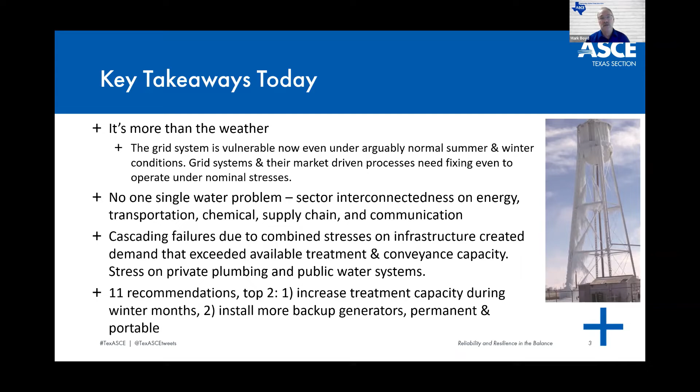As you'll see on the upcoming slide, it's not just about the weather. The grid and its associated system processes are vulnerable even under nominally serious weather conditions. The weather is only part of the story. Cascading failures were experienced in 2021, which necessitates a hard look at private and public plumbing water conveyance systems and processes. Increasing available treatment capacity all year round and hardening key infrastructure against power loss are two of the committee's key recommendations. Julie will go over the 11 recommendations set forth by the committee toward the end of today's presentation.

The committee's position is that weather is part of the story, as I said, but not at all the most important part. The grid is vulnerable to stresses from weather and climate conditions well within the extremes experienced in February 2021, such as the infamous event of February 2011, which is not nearly as severe. I'll speak more about that shortly, but first let's talk about what happened that week. Next slide.

So Texas became a purple state that week, apparently. It's not political, it just did. We chose this color. Extreme conditions, absolutely yes. These two graphics tell the story by the numbers in a sense. By and large, the entire state was blanketed in a minimum and maximum daily temperature 20 to 25 degrees below normal mean temperatures. The comparative normal temps we used were based on recent averages, 1991 to 2020.

But what really happened? The weather system event of February 2021 was severe. It was the first time in history that all 254 counties were placed on winter storm warning. Fortunately, the physically damaging ice storms during winter storms Uri and Viola were localized in impact and wind was relatively moderate. Temperatures were not. Some NOAA experts have indicated that the storms were a 1 in 100 year or 130 year system event. The severity of winter storms' impact on infrastructure has four primary dimensions.

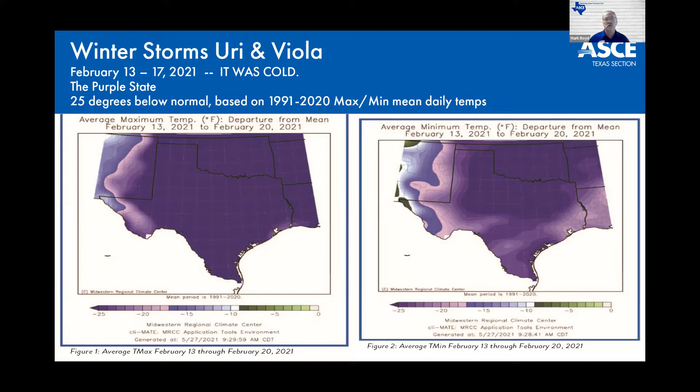So here's kind of a historical perspective on this. With Dennis Qualls doing much of the heavy lifting on the concept, this graphic was put together to display the 2021 winter storm in historical perspective. So I myself looked at hundreds of weather station data spreadsheets, and I was looking for stations exemplary of major population centers throughout the state. So no doubt a researcher could do a deep dive and find some regional data that does not reflect these exact characteristics. The color code scheme is explained on the graph, but basically we were trying to depict which historic storms might compare to the severity and danger to the public of the 2021 storms.

We identified 6 storms which had statewide impact similar to the 2021 storms. The most dangerous event in the 80-plus year record happened in 1940, when the population was substantially less, at 6.4 million in Texas compared to today's 30 million. Per capita demands on the grid were much lower back then. Home heating was not as much of an issue with wood burning stoves, and there was a much higher percentage of folks without electrical service and indoor plumbing.

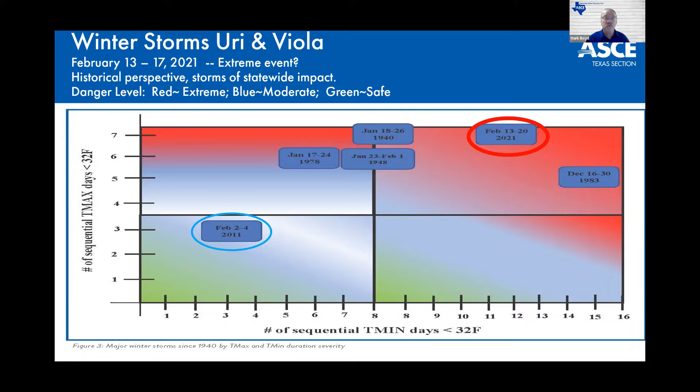Well, thank you, Mark. My name is Julie Hunt. Shay Rolson and I are co-chairs of the Water Resources Subcommittee of the ASCE Beyond the Storms Committee. I'm a civil engineer with over 25 years of experience in the water industry. My roles have ranged from operations to executive leadership positions and now consulting. Shay is also a civil engineer with more than 25 years of experience in the planning, design, and construction of water, wastewater, and reclaimed water infrastructure for municipal water utilities across Texas.

So how did winter storms Uri and Viola impact water resources in Texas? And what can we learn from it? That is the question our subcommittee set out to answer. As background, we define water resources as water, wastewater, and stormwater infrastructure that serve the public. In 2019, the state of Texas had 7,056 water systems serving over 29 million people. Of these systems, most are groundwater, which means they take their water from underground aquifers, and about 20% of the systems are surface water, which means they take water from rivers and lakes.

Water utilities deliver potable water to customers through a system of transmission and distribution pipelines and maintain minimum water pressures using pump stations and elevated storage tanks. The state of Texas has nearly 4,000 wastewater outfalls, which are points where treated effluent from wastewater treatment plants is discharged to creeks and rivers. To convey wastewater from homes and businesses to treatment plants, utilities own and maintain a system of gravity sewer pipelines, lift stations, and force mains.

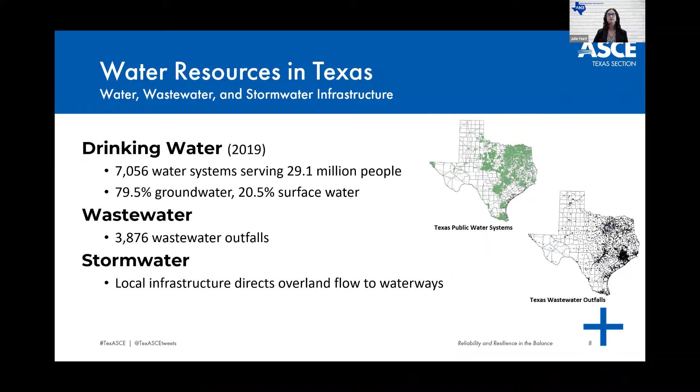Stormwater infrastructure is the infrastructure that conveys rainwater that falls on the ground and makes its way to waterways, streams, lakes, and the Gulf via overland flow, and sometimes via a complex system of various storm drain infrastructure, such as inlets, pipes, tunnels, detention, and retention ponds. The effects of the 2021 winter storm were primarily felt in the water system, so we will focus on drinking water today.

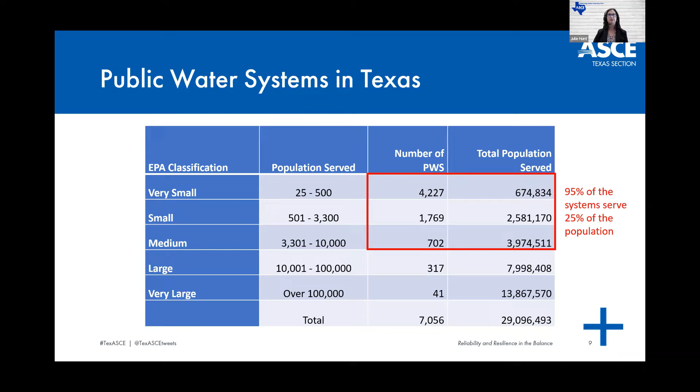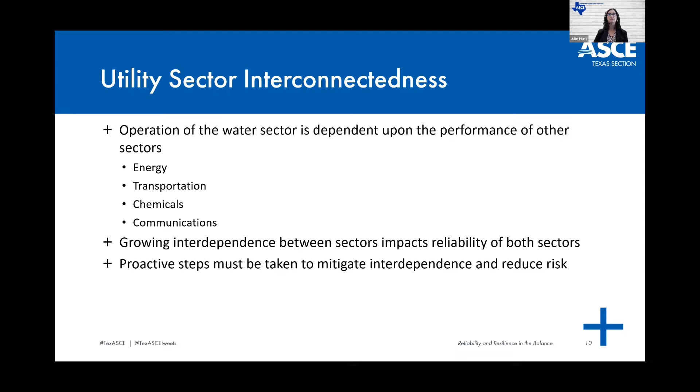Approximately 95% of water systems in Texas serve 10,000 people or less, representing 25% of the population of Texas. Conversely, the large and very large systems in Texas serve approximately 75% of the population. Water resources cannot be looked at in a vacuum. Other infrastructure sectors influence and impact water resources and vice versa. The other infrastructure sectors include, but are not limited to, energy, transportation, chemicals, and communications. There's growing interdependence between all of these sectors, and we'll see today how important it is to take proactive steps to reduce the risk this poses.

Water utilities do prepare for and anticipate emergencies. There are several guidance references for water utilities to use in this preparation. In accordance with TCEQ subchapter D, Rules and Regulations for Public Water Systems, water systems are required to be designed to maintain a minimum pressure of 35 psi at all points within the distribution network at flow rates of at least 1.5 gallons per minute per connection.

When the system is intended to provide firefighting capability, it must also be designed to maintain a minimum pressure of 20 psi under combined fire and drinking water flow conditions.

The America's Water Infrastructure Act of 2018, AWIA, requires systems that serve more than 3,300 people, which is about 14% of water utilities serving 89% of the population of Texas, to complete a risk and resilience assessment, also called an RRA, develop an emergency response plan, these are called ERP, and certify to the U.S. Environmental Protection Agency that they have done so. These plans must be updated and recertified every 5 years.

The American Water Works Association policy statement on electric power reliability for public water supply and wastewater utilities states that every water and wastewater utility should set uninterrupted service as a high priority operating goal.

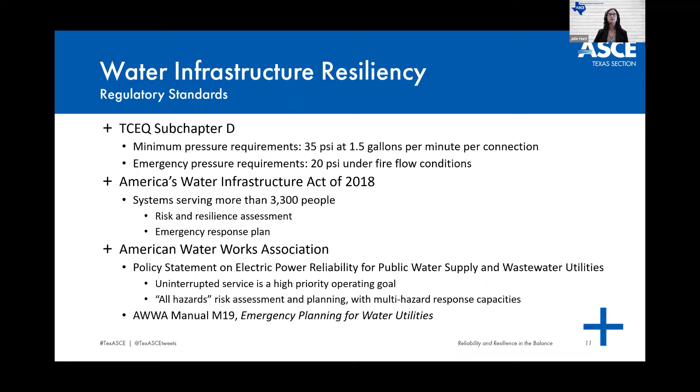In order to maintain the required levels of service, water, wastewater, and stormwater utilities engage in some level of all hazards risk assessment and planning, an approach that includes the full spectrum of occurrences that could happen without focusing on specific risks, such as malicious acts or natural disasters. The emphasis is on developing multi-hazard response capacities that address the most common risks for the utility, but also provide capacity to respond to less likely risks.

The AWWA published Manual M19, Emergency Planning for Water Utilities in 2018, which provides guidelines and procedures that can be used by water utilities in preparation for emergencies and disasters. In this document are summaries of potential hazards, as well as identification of common water system components and how each may be vulnerable. A range of mitigation actions that can be taken to decrease the vulnerability of components is discussed, along with consideration of costs and benefits of such actions.

The AWWA Manual M19 provides an excellent framework from which to begin considering emergency events experienced in the state of Texas. So with this background on utility preparations for emergencies, we now look at the events of February 13th through the 17th of 2021. The storm included major ice and snow for much of the United States. There were various winter weather alerts, and the storm caused blackouts for millions of people, including significant power issues in Texas.

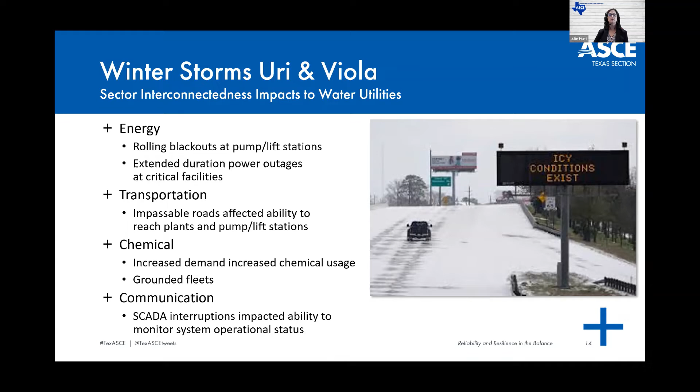Water utilities also use wired and wireless communications to collect and transmit system and operations data to a central control center. Fiber optic and radio system failures during the storms impacted some systems' abilities to monitor system operations.

As the temperatures dropped and water demands increased due to customers dripping their faucets, along with private premise plumbing breaks and main breaks, many water utilities had to treat and distribute water to meet demands that abnormally reached or exceeded peak summer day levels. Many water utilities had to bring additional water treatment capacity online.

For the first 4 days of the freeze, water production is able to keep pace with the demand. But as freezing weather and power outages linger, demand begins to outpace production and storage drops to essentially zero. At that point, water pressures dropped below 20 psi and systems were forced to issue boil water notices.

In total, over 2,300 public water systems issued boil water notices, affecting a population of nearly 18 million people. The boil water notices issued were a direct result of the storm relating to power loss, damaged equipment, loss of pressure, and dangerous road conditions.

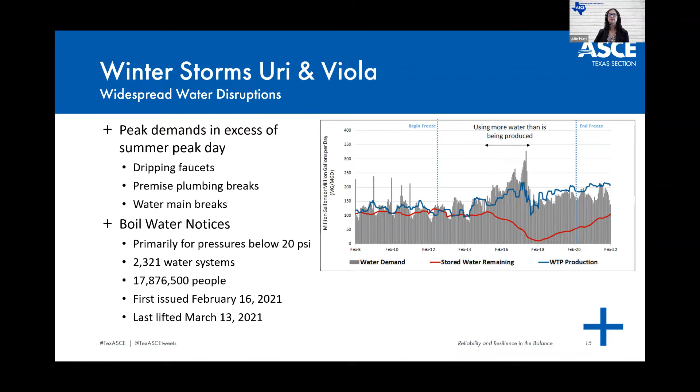The first boil water notice issued in the state was on February 16, 2021, and the last boil water notice lifted was on March 13, 2021. Compounding the problem was the lack of power to boil water, leading to shortages of bottled water in grocery stores. I will now turn the presentation over to Shay to discuss the results of a utility survey that was conducted by the committee.

Thank you. So to gain greater insights into the specific challenges faced during the winter storm, a high-level informal survey of Texas water utilities was performed by the Water Resources Subcommittee. Participation in this survey was entirely voluntary, and the information obtained from those that participated offers useful elements for consideration.

Of the 17 respondents, which is about a 24% response rate, all of them served system populations greater than 3,300 people, with 9 respondents serving populations greater than 100,000 people. All but 2 provide water service, 11 provide wastewater, and 6 provide stormwater.

We asked each utility to provide information on these 7 areas, essentially spanning the past, present, and future of risk resilience, planning, and emergency response. We asked what types of proactive risk mitigation they had done over the years and what their typical winter weather preparations were. Specific to the 2021 winter storm, we asked what they did immediately before the storm, what their experiences were during the storm, and what was required for system and community recovery.

Finally, we asked about short and long-term planning underway. Most respondents found the most significant problems were in their water systems, as Julie said earlier, so that's where we'll focus the rest of our time today.

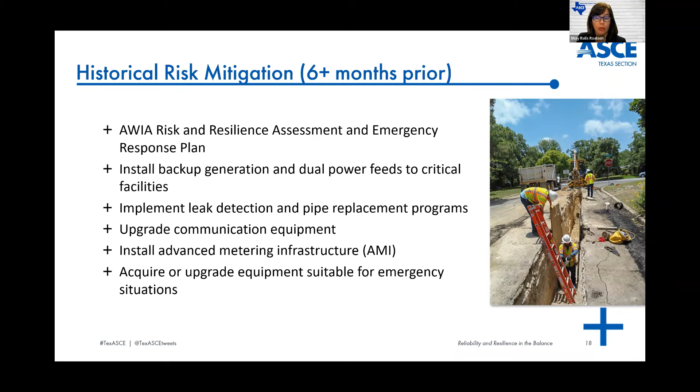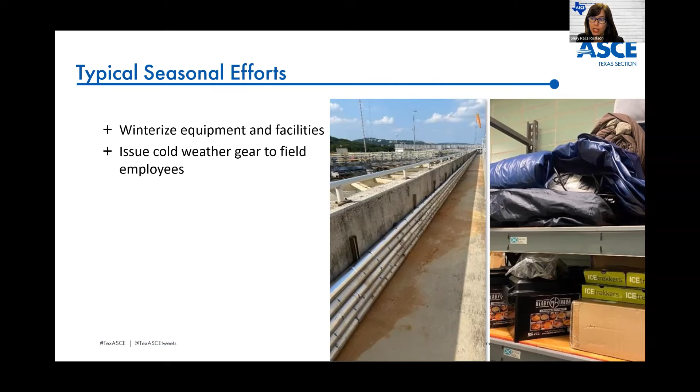Utilities told us that they typically implement winterization efforts seasonally, which helped to limit the freezing of critical infrastructure at pump stations and treatment plants and equip operators for safely working in freezing conditions, including sheltering in place if needed.

As Winter Storm Uri approached, utilities confirmed their earlier winterization efforts, implemented additional freeze protection, and tested backup protocols. They topped off storage in the distribution system and chemicals, fuel, and supplies at treatment plants and pump stations. They sanded roads and pumped down sludge holding tanks.

Utilities also increased communications with their staff, revised schedules to accommodate round-the-clock activities, and assigned staff to areas where manual operation may be needed. Utilities issued public communications advising their customers on how to keep premise plumbing from freezing, including dripping faucets and opening cabinet doors to allow warmer air to surround under cabinet piping.

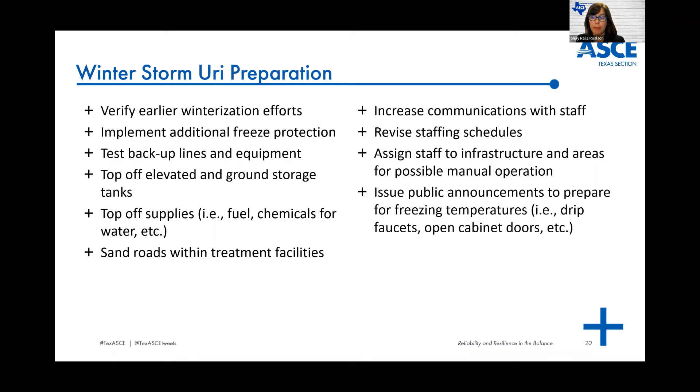During the storm, utilities were extremely busy with additional tasks that resulted from the cascading events of prolonged freezing and power outages. In the treatment plants, they brought on additional treatment capacity while knocking down pipe and equipment problems caused by the extended freeze. Regulatory staff stepped up monitoring, and when pressures dropped below 20 psi, coordinated the significant effort required to issue boil water notices, and then immediately began planning the complex process of lifting the notices.

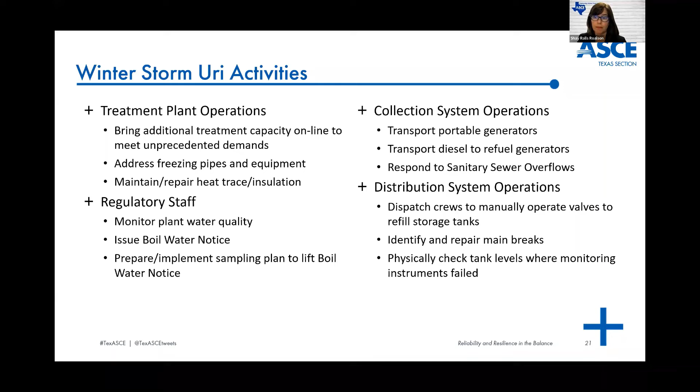In the collection and distribution systems, crews transported portable generators as power outages rolled across their service areas. They responded to leaks and sanitary sewer overflows and manually operated equipment and valves and observed system performance. Utility staff were busy with securing lodging, food, supplies, and transportation for field and emergency management staff. Customer support staff responded to record-breaking numbers of calls and coordinated the delivery of bottled water.

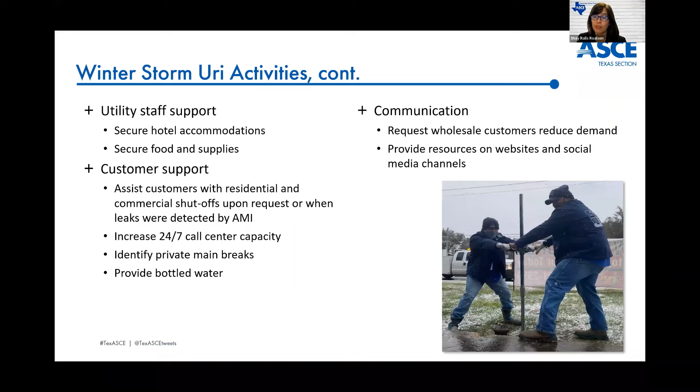Communications teams stood up leak maps in real time, attempted to keep news outlets informed, and posted on social media around the clock. And let's not forget that all of this took place in the middle of a global pandemic. After the storm, utilities remained busy with repairing main breaks and assisting customers with isolating private side plumbing leaks. Field crews remained on emergency 12-hour rotations for several more days.

As the water quality testing was underway in the distribution system to support lifting the boil water notice, utilities continued to distribute bottled water. Some multifamily residential suffered such catastrophic premise plumbing failures the utilities provided taps on nearby fire hydrants for residents to fill buckets. Financial staff immediately began working on bill relief, and management staff rolled right into after-action assessments.

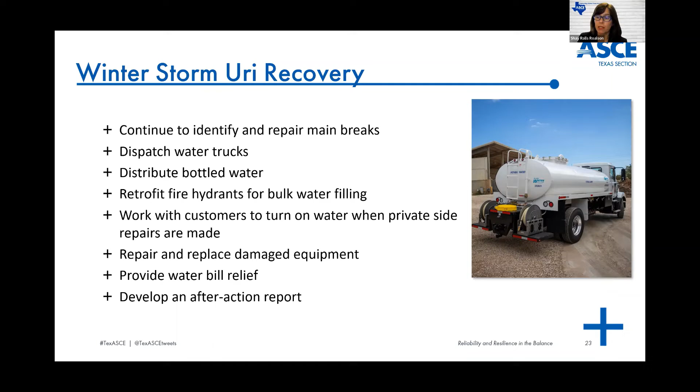Our evaluation of the results of the survey, as well as our own experiences during the storm, supported the finding that it was a cascade of failures that led to widespread water outages and boil water notices across the state. Excessive demands coupled with inadequate treatment and conveyance capacity crippled water systems' ability to maintain adequate water pressure and service to customers.

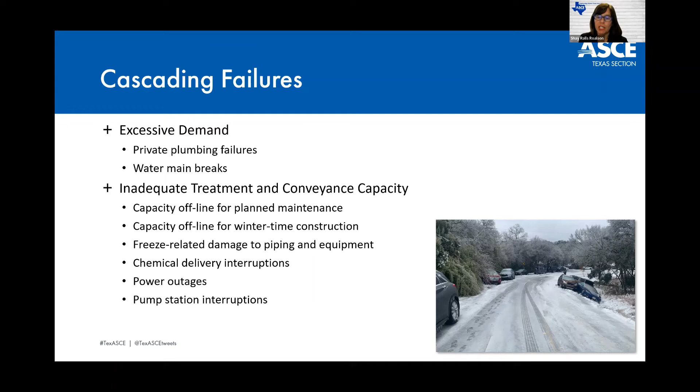On the demand side, dripping faucets and pipeline failures caused by the winter storm caused unprecedented demand in excess of summertime peaks. On the supply side, many utilities had treatment capacity out of service for planned maintenance or construction, a common practice in Texas's usually mild winters. Utilities worked to bring that capacity online, but freezing weather, impassable roads, and power outages more than outweighed those efforts.

Let's walk through a brief graphic to illustrate this cascade of events. We'll look at what was happening in the water treatment plant, shown in the blue section, what was happening in the distribution system, including pipelines and pump stations, in the green section, and what was happening in customers' homes and businesses, shown in the orange section. Note that customers were facing many other challenges during the winter storm, but for the purposes of this discussion, we're focused on what was happening in private plumbing.

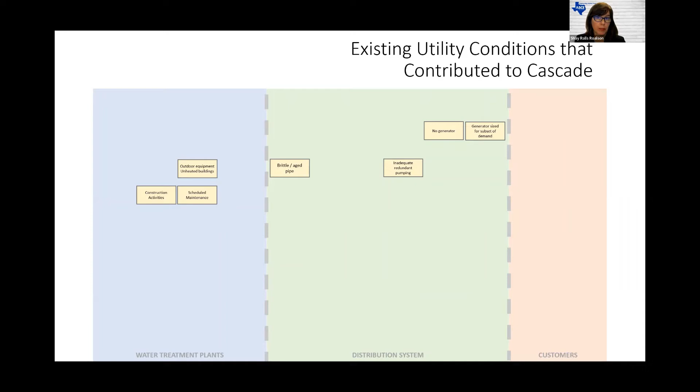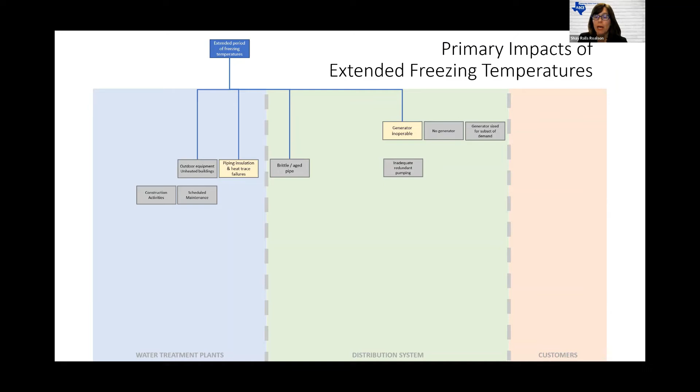Some utilities had existing conditions that made them vulnerable to the events of Winter Storms Uri and Viola, such as treatment equipment out of service for winter maintenance or construction, old cast iron pipe in the distribution system, and lack of power generation or inadequate redundancy at pump stations. As the freezing weather dragged on over several days, utilities began to experience equipment and generator failures in plants and pump stations. Pipe insulation and heat trace failures also occurred.

No relief from freezing temperatures, combined with additional precipitation from Winter Storm Viola, created treacherous road conditions that made it difficult to haul off treatment plant sludge, receive chemical deliveries, and deliver fuel and portable generators to pump stations. As widespread power failures rolled across utility service areas, plant and pump station operation were impacted. Customers were unable to access public communication, and the extended period of time without heat caused piping inside homes to begin to freeze.

As these conditions persisted and overlapped, utilities began to see rising equipment and piping failures. Utility crews were consumed with repairing equipment failures in treatment plants and pipe breaks in the distribution system. They continued to haul portable generators and refuel permanent generators to keep pump stations operational. Customers' pipes froze and broke.

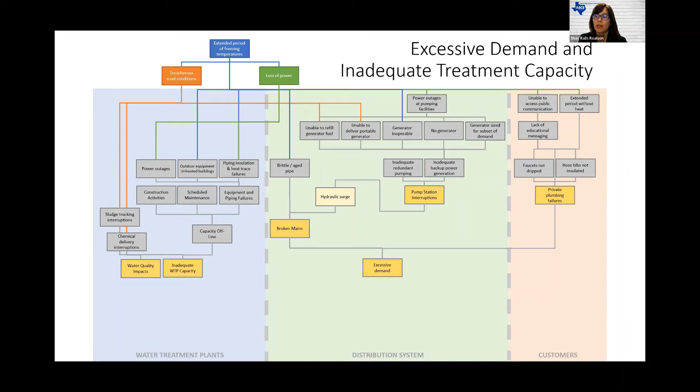With all of this happening all at once, systems experienced unprecedented demands that exceeded a normal peak summer day, coupled with inadequate treatment and conveyance capacity to meet those mounting demands. Utilities were unable to maintain storage in their systems, pressures fell below 20 psi, and boil water notices were required. Many customers had no water at all.

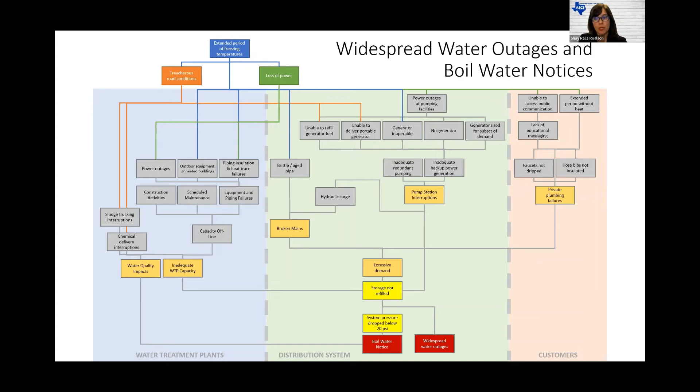Only when power was restored, temperatures rose and stayed above freezing, and road conditions improved, were utilities able to restore system operation, replenish storage, and lift boil water notices. Even before utilities had recovered from winter storms Uri and Viola, the Texas legislature began crafting Senate Bill 3. This bill provides for the preparation for, prevention of, and response to extreme weather emergencies and extended power outages.

The new law creates Section 13.1394 of the Texas Water Code, which expands the definition of an affected utility to include every water utility in Texas. By November 1st, 2021, water utilities were required to submit information to the Public Utility Commission of Texas, identifying each electric utility that provides service to the utility, including transmission and distribution, as well as retail providers. Water utilities were also required to provide those electricity providers with a list of their critical infrastructure.

Emergency preparedness plans were due to the Texas Commission on Environmental Quality by March 1st of 2022. These plans may utilize any combination of 14 available options to demonstrate that the system can maintain water pressures above 20 psi for power outages lasting 24 hours or more. The options can be broadly categorized as power resiliency, distribution system resiliency, and shared resources with other utilities.

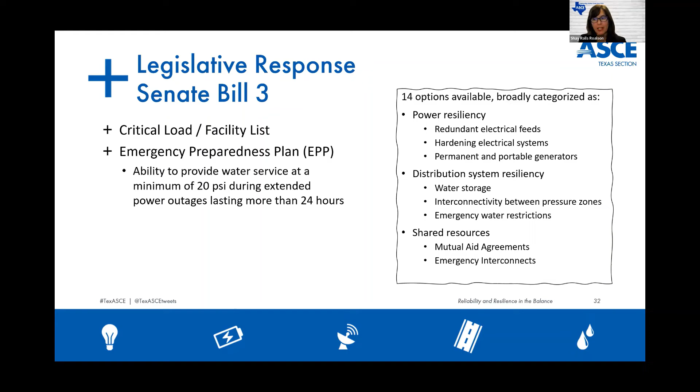At this time, all utilities should have completed these plans and be looking forward to winter 2023 with confidence that they are as prepared as they can be. Julie will wrap up our findings with the subcommittee's list of recommendations. All right, based on all this analysis, the Water Resources Subcommittee compiled 11 recommended actions.

So first of all, consider revising schedules for winter maintenance and construction to increase the amount of treatment capacity available during winter months. Consider increasing the number of backup generators, including portable backup generators on trailers and portable diesel pumps. Consider implementing backup power for SCADA communications. Consider increasing bulk chemical storage.

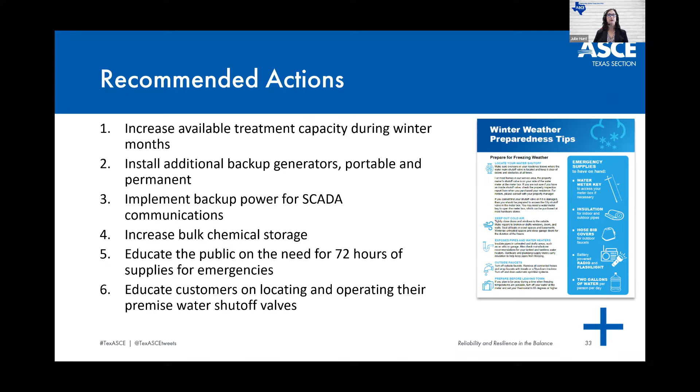Educate the public on the need for 72 hours of supplies for emergencies. Educate customers on locating and operating their premise water shutoff valves. Replace cast iron pipes with a history of poor performance. Invest in all-weather vehicles and stage those vehicles for staff access prior to the arrival of winter weather. Top off water supply storage prior to a winter storm event.

Conduct winter weather preparation at facilities such as pipe insulation, draining non-critical piping, storing and distributing winter weather gear, such as strap-on boot spikes, making sure there's bedding available for staff that need to stay overnight, food, such as MREs, and ensure manual access to critical facilities, such as walk-through gates. Invest in automated metering infrastructure implementation.